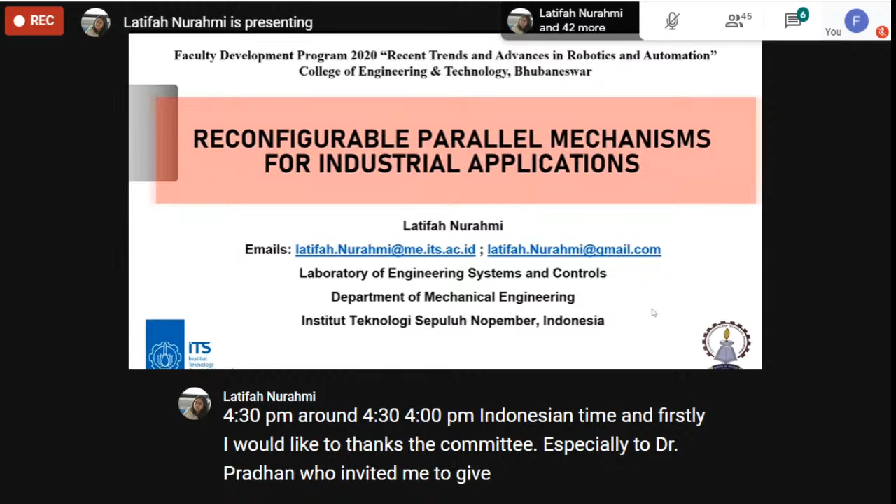All right, so good afternoon everybody. This is now 4:30 p.m., around 4:34 p.m. Indonesian time. Firstly, I would like to thank the committee, especially Dr. Pradhan, who invited me to give a talk this afternoon. And I would like to say welcome to the participants and thank you for joining my talk.

Without further ado, what I'm going to present today is mostly about my research. I would be very happy on this occasion to disseminate my research results. The topic I will talk about today is reconfigurable parallel mechanisms for industrial applications. I am Latifah, here's my email, if you like to discuss in more detail you can contact me either via Gmail or official mail. I'm coming from the Laboratory of Engineering Systems and Controls, Department of Mechanical Engineering, at Institut Teknologi Sepuluh Nopember.

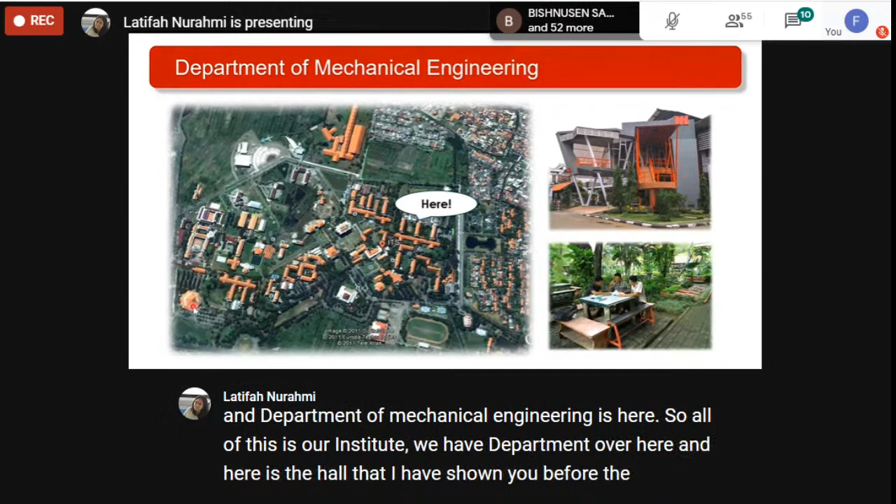We have a department over here, and here is the hall that I have shown you before, the hall to be rented for special occasions, public or even private. And in the right picture, this is the front gate of the mechanical engineering department. We have an M symbol for mechanical engineering, and here it is.

Our campus is very green. We have many big trees. Well, anyway, this is a rainforest tropical country, so we have many big trees, so the students may enjoy studying with their friends.

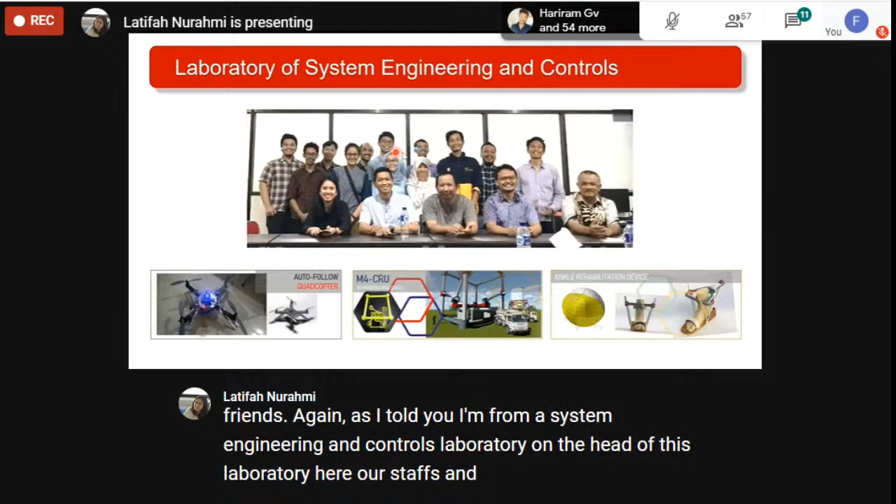Again, as I told you, I'm from System Engineering and Controls Laboratory. I'm the head of this laboratory. Here, our staff and students all together, this is what we are doing in this lab. So we are doing basically many things about controls, not specifically about robotics. Robotics is just part of it, what I'm doing. But my colleagues, they are doing also controls for industry, controls for process plant industry, and many applications.

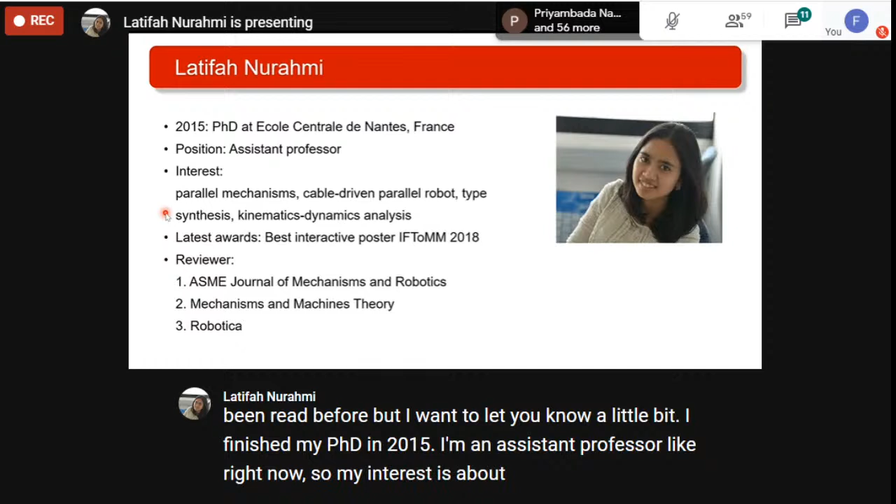My short biography has been read before, but I want to let you know a little bit. I finished my PhD in 2015. I'm an assistant professor right now. My interest is about parallel mechanisms, cable-driven parallel robots. I like to do type synthesis - this is more about design. And I'm doing kinematic dynamics analysis. I'm an active reviewer of ASME Journal of Mechanisms and Robotics. If you are doing research in robotics, then you will know this journal, Mechanisms and Machine Theory, and Robotica by Cambridge Press.

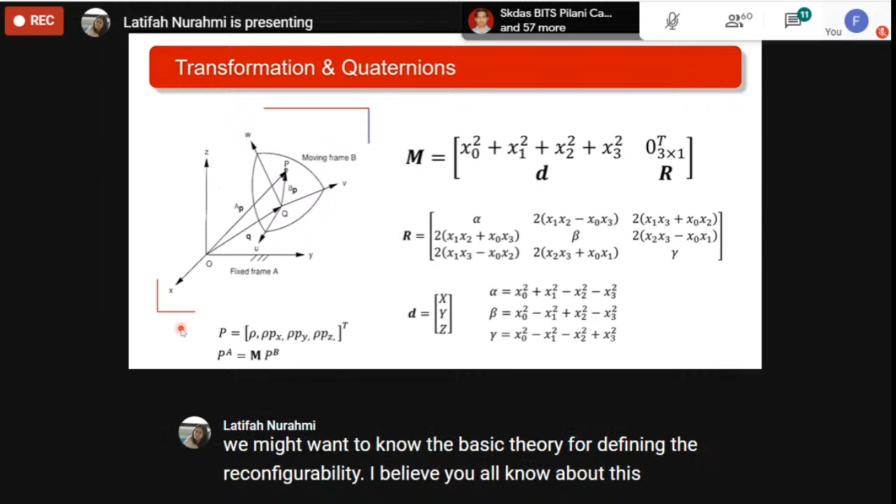All right, so before coming into reconfigurability, we might want to know the basic theory for defining reconfigurability. I believe you all know about transformations, since we are doing research in robotics. This is the main soul of robotics - it's about transformations.

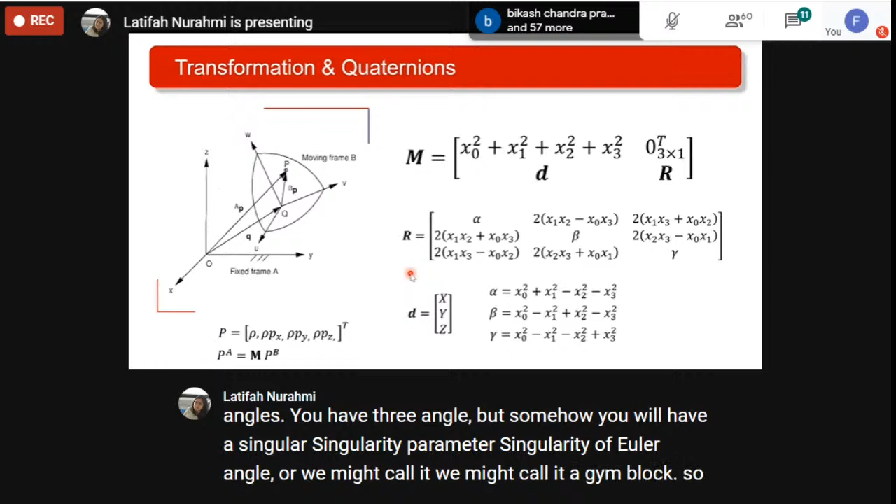And the transformation matrix that I use is basically the same like a Cayley - the Cayley algebra. And I am using Cayley or quaternion. Quaternion is more well known, so I'm using quaternions. Quaternions is basically homogeneous rather than using Euler angles. With Euler angles, you have 3 angles, but somehow you will have a singularity, parameter singularity of Euler angle, or we might call it Gimbal lock.

So instead of using Euler angles, I'm replacing it by using quaternions. I'm using 4 parameters, x0, 1, 2, 3. But if you search in many literature, they are using it with different notations, q0, 1, 2, 3 - basically they are the same. So here is my rotation matrix, and I have a translational vector d, and I believe you all know this - d is simply a translational displacement vector x, y, z.

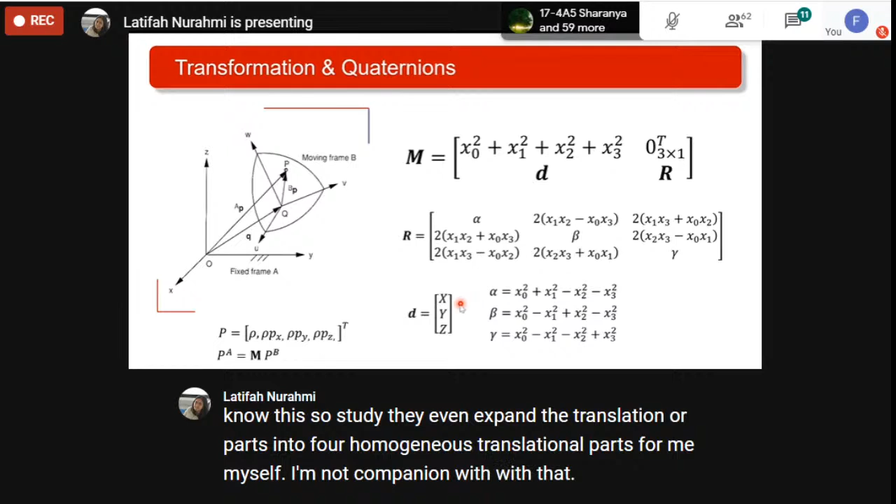My colleagues - I have been working with an Austrian robotician - they like transformations in terms of study. Probably you know this, so study expands the translational parts into 4 homogeneous translational parts. For me, myself, I'm not comfortable with that convention, so I prefer to use a displacement vector and rotational matrix in terms of quaternions.

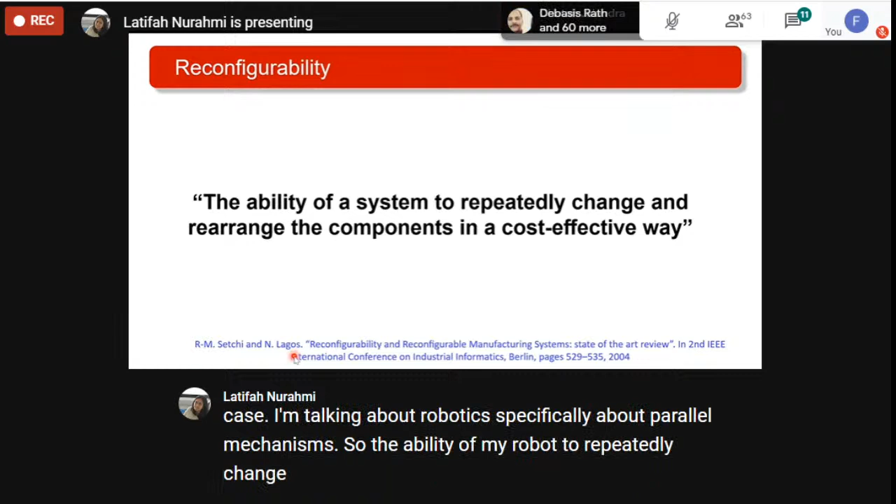So that was the basic - I believe you all know about that. Now let's come to the term reconfigurability. I've taken this from the paper of Setchi and Lagos. The definition of reconfigurability is the ability of a system, any system - in this case, I'm talking about robotics, specifically about parallel mechanisms - to repeatedly change and rearrange the components in a cost-effective way.

So without disassembly and assembling it back, I can change to different motion types, let's say, to different orientations continuously. So we call it a cost-effective way.

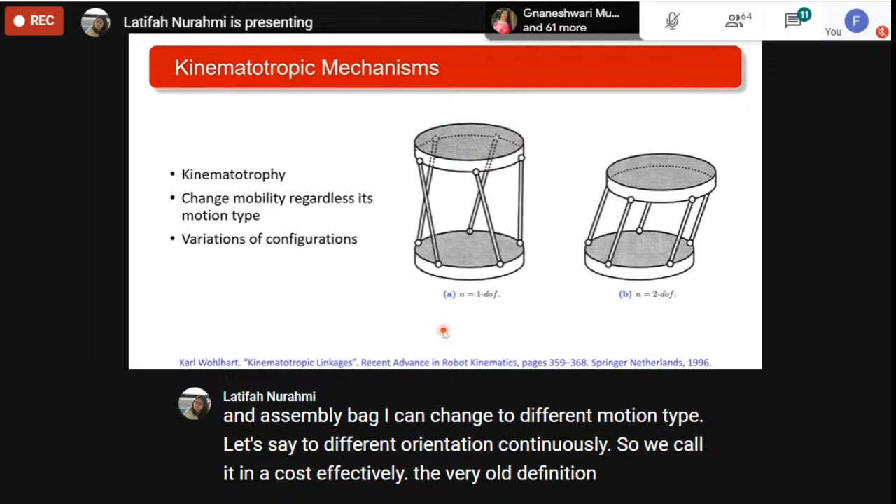The very old definitions of reconfigurability is kinematotropic mechanisms, based on the change of kinematic behavior - that's why they call it kinematotropic. So it has kinematotropy properties, and it can change mobility regardless of its motion type. We don't care whether it is 1 translation, 2 rotations, or 2 rotations 2 translations - we don't care about the motion type, but we care only about the change in the number of degrees of freedom. And it really depends on the variations of configurations.

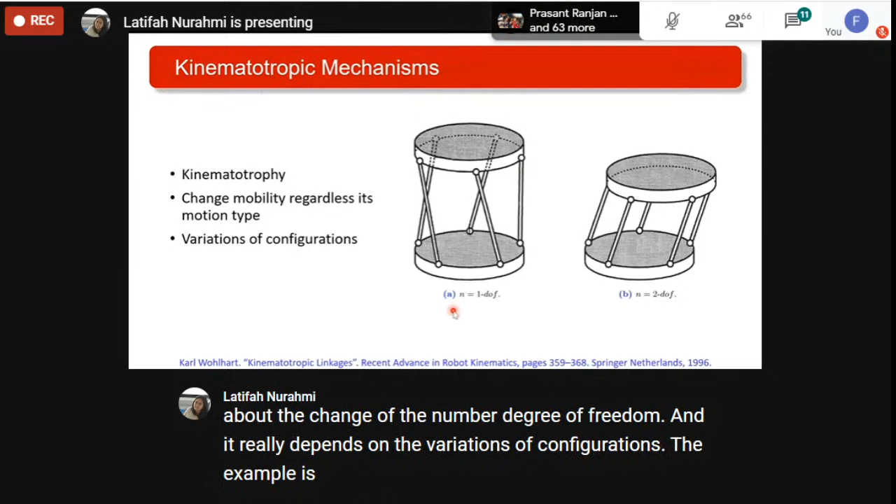The example is here - this is quite easy. Here is a spherical and spherical joint - there is no prismatic in the middle, so this is simply an SS kinematic chain. Then if you assemble it all together, you have like 5 legs all together. So you can either make it straight like this, then it will have 2 degrees of freedom - you will have translation, right? Circular translation. Or if you twist the kinematic legs, then you have only 1 degree of freedom rotational motion.

So this is the definition of kinematotropic mechanisms, the very beginning description of reconfigurability.

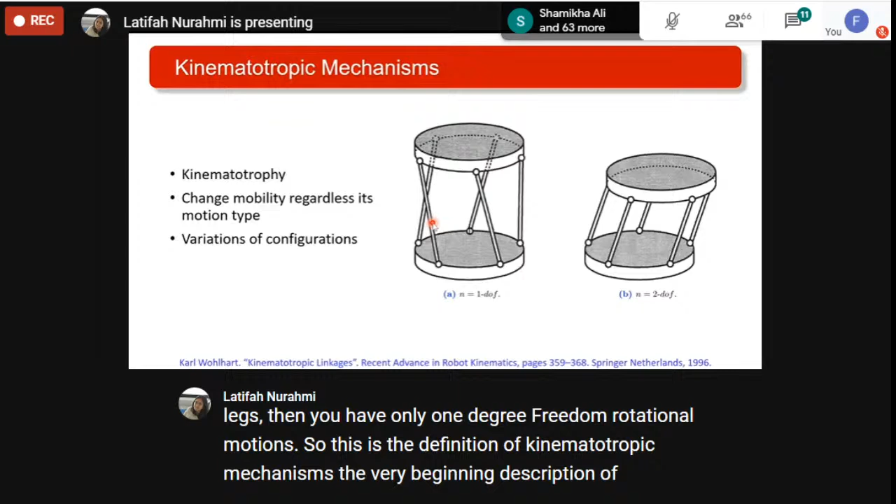Okay, right now let's continue to the second definition. So reconfigurability covers many sub-definitions, and the second definition is metamorphic mechanisms.

It is based on the characteristic, the animal characteristic of metamorphism. So the term was adopted from that.

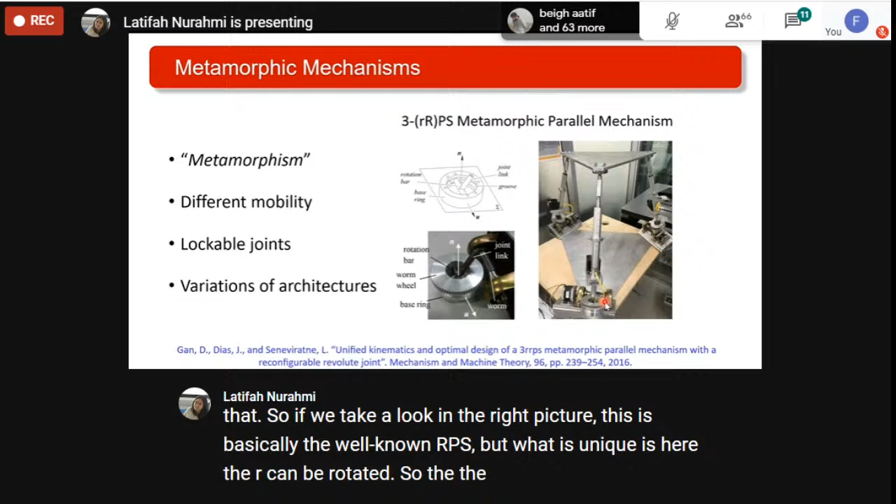If we take a look at the right picture, this is basically the well-known RPS. But what is unique here is the R can be rotated, so the axis of the revolute joint can be oriented to different directions. That's why we call it R small and R capital, because the R small is meant to change the direction of the revolute joint.

If we take a look here in more detail, we have this revolute prismatic along the way. The direction of U can be rotated like this due to the rotation about N. So we call this a metamorphic joint, because once it can be revolute when you fix the discrete rotation of N, and once it can be a universal joint. So it is a metamorphic joint.

If you assemble that into mechanisms, we call it metamorphic parallel mechanisms. So what happens if you use this kind of metamorphic joint? You will have a change of mobility. I will talk in more detail about this.

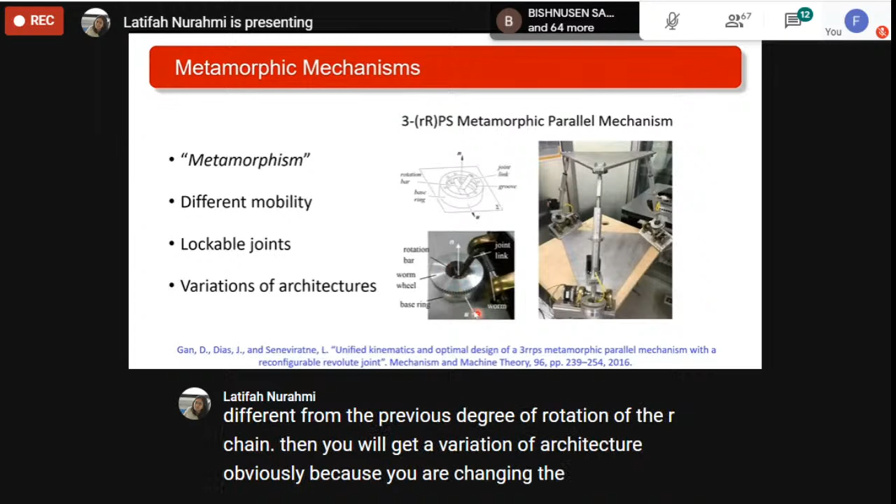We call this joint a lockable joint, because after you rotate it some degree, you lock the small r, and you will get RPS, but the motion of this RPS will be totally different from the previous degree of rotation of the R joint. Then you get variations of architecture, because by changing the direction you get a different architecture of RPS. This paper was published with my colleague Dongming Gan, and we met at a conference.

By the way, conferences are very good events for us to meet with other researchers and collaborate. I met him at a conference in Hong Kong, and we found something in common. He had a problem, and I had the tool to solve it, so finally I could use my tool to solve his problem.

He had that robot back in his office, but he wanted to know about the workspace, how the mechanism behaves with the change of the lockable joint, with the change of the metamorphic joint. So we used the powerful tool based on quaternions.

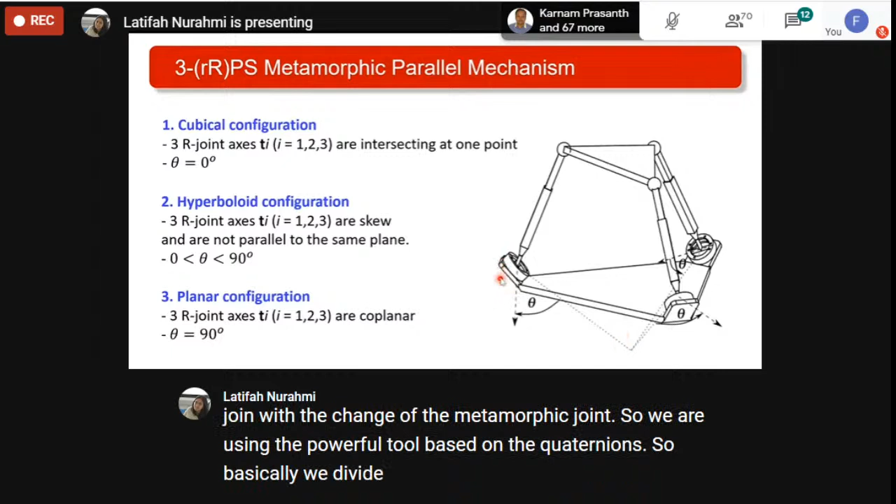Basically, we divide the architecture into three categories. The first category we call cubical configurations, because if theta is 0, all the revolute axes will intersect at one point, and at some angle these dashed lines can be orthogonal to each other. That's why we call it cubical configurations.

The second configuration is hyperboloid, where theta is within 0 and 90 degrees. You can imagine all revolute joints are skew and become a hyperboloid. Hyperboloid is like when you have sticks vertical altogether and you twist it, then you get this hyperboloid configuration.

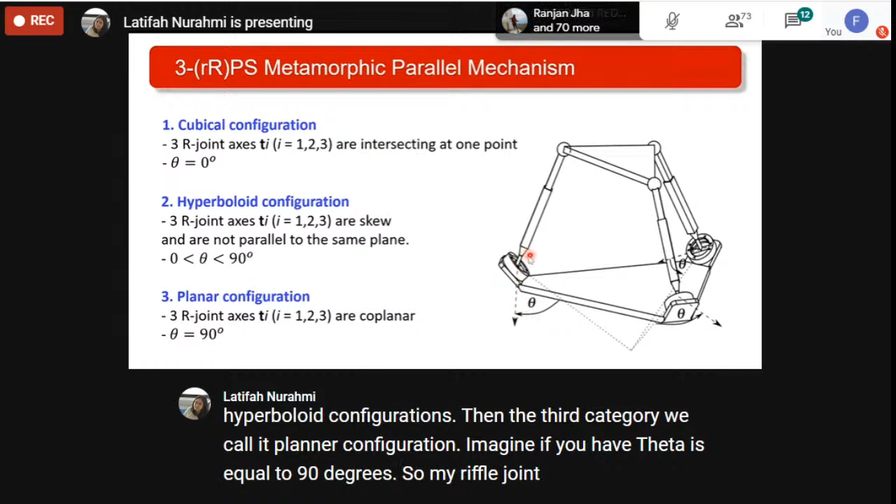The third category we call planar configuration. Imagine theta equals 90 degrees, so all my revolute joints will be horizontal. The well-known traditional RPS belongs to this category.

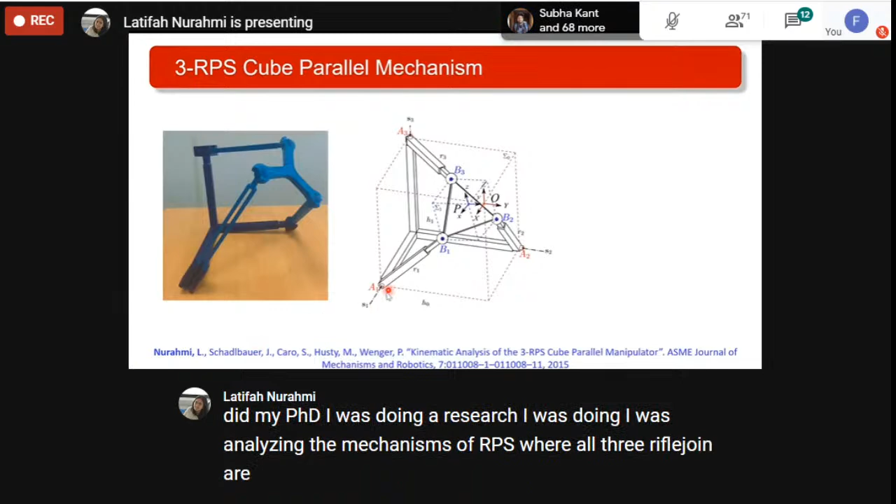After defining all the configurations one by one, now we will focus on the first configuration, cubical configurations. What is unique about this mechanism is, back when I did my PhD, I was analyzing the mechanism of RPS where all three revolute joints intersect at one point and are all perpendicular to each other. So we still call it RPS, but with an additional term: RPS cube parallel mechanisms.

This was done during my thesis, using algebraic geometry. This is a very powerful tool, algebraic geometry. And everything was done in implicit equations.

Basically, this point B, the spherical joint at point B_i, is moving on the yellow plane perpendicular to the axis SI. So I can formulate it in terms of geometry and algebra, and get the constraint equations.

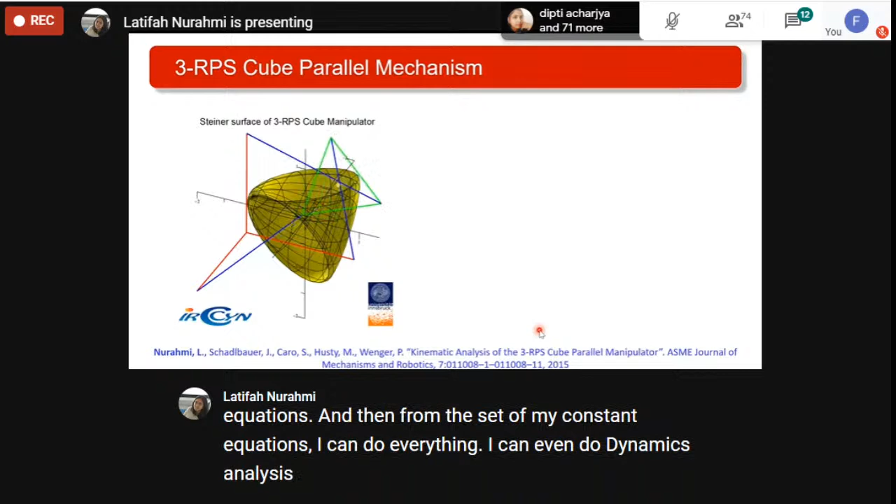From the set of my constraint equations, I can do everything, even dynamics analysis, because those are the basics. Here, my focus was to find the workspace. This was a collaboration with Innsbruck University, with a professor from Austria.

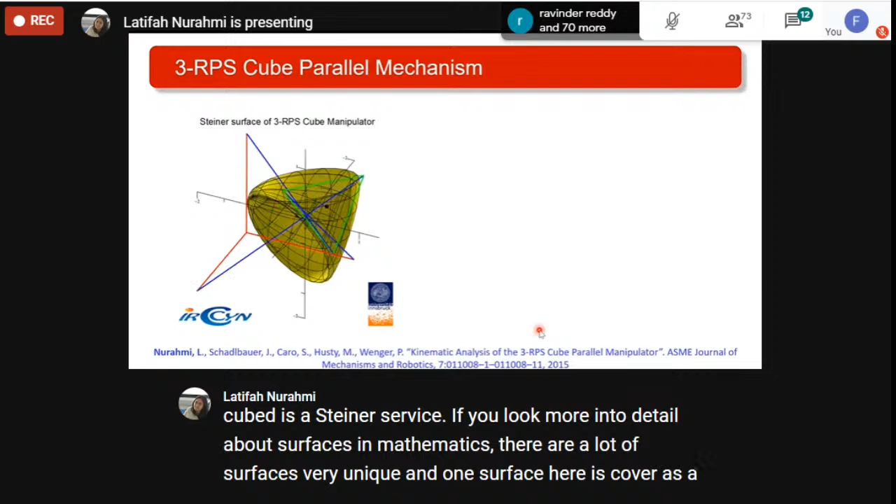My workspace, the workspace covered by this RPS cube, is a Steiner surface. If you look in more detail about surfaces in mathematics, there are a lot of very unique surfaces, and one of them is covered as the workspace of my mechanism. You can see in the left animation how my mechanism moves inside the workspace. Yes, this is actually the Steiner surface.

I'm going to tell you a bit of detail about what it is. This surface has self-intersecting and symmetrical surfaces. All the surfaces are symmetrical, and it has lines that intersect all together at one point here.

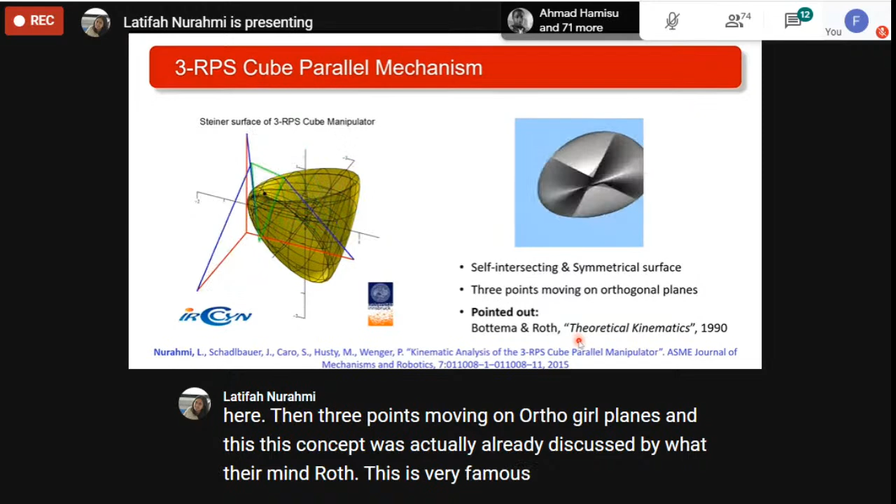Three points moving on orthogonal planes - this concept was actually already discussed by Bottema and Roth in their very famous 1990 book, Theoretical Kinematics. If you want to focus more on kinematics, I suggest you read this book. It's old, but it also discussed three points moving on three orthogonal planes.

Imagine, years later, those theories actually exist these days - here is my robot. The three points of my platform are moving on three orthogonal planes. This work has been published in the Journal of Mechanisms and Robotics in 2015.

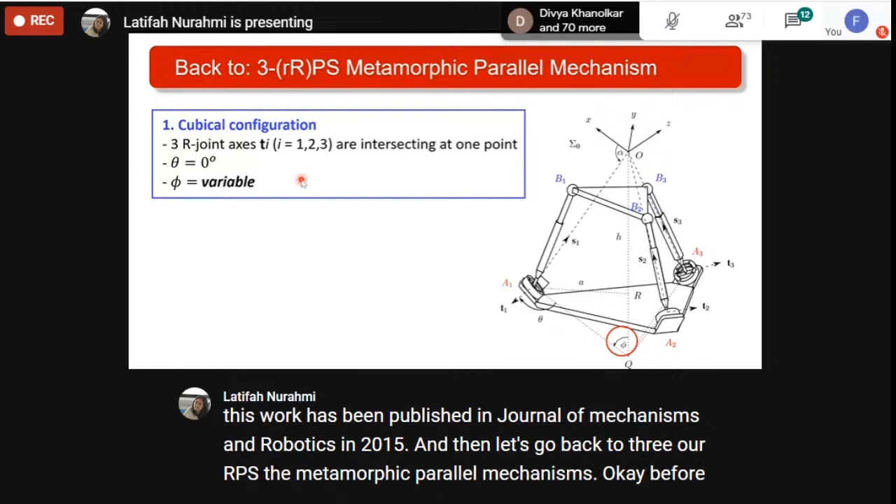Let's go back to 3-RRPS, the metamorphic parallel mechanisms. Before, what I presented to you was 3-RPS done during my thesis work. Then when I met my partner here, we discussed his mechanisms and his problems. Finally, the topic I covered was a subset of his.

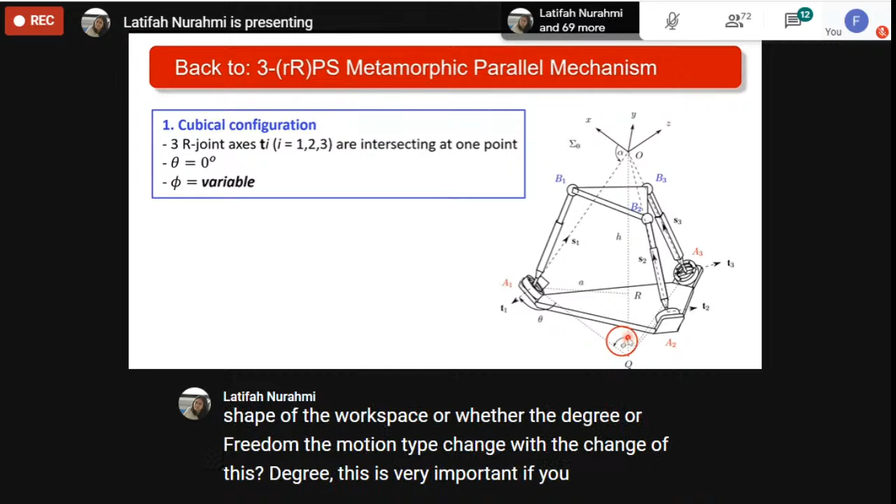The first configuration is the cubical configuration, when theta equals 0 and phi equals some degree from 0 up to 90 degrees. Now we want to see how the platform behaves - meaning the shape of the workspace, and whether the degree of freedom or motion type changes with this degree. This is very important if you want to design something and know whether your platform really targets your application, either for surgical or industrial use. So this is what we were doing.

With the change of phi, varying from 30 degrees, 45, 54.7, and 60 degrees, see how the workspace looks. It looks exactly like what I covered 5 years ago. My workspace, the Steiner workspace, is this one. When phi equals 54.7, all these dashed lines become perpendicular to each other, become orthogonal to each other.

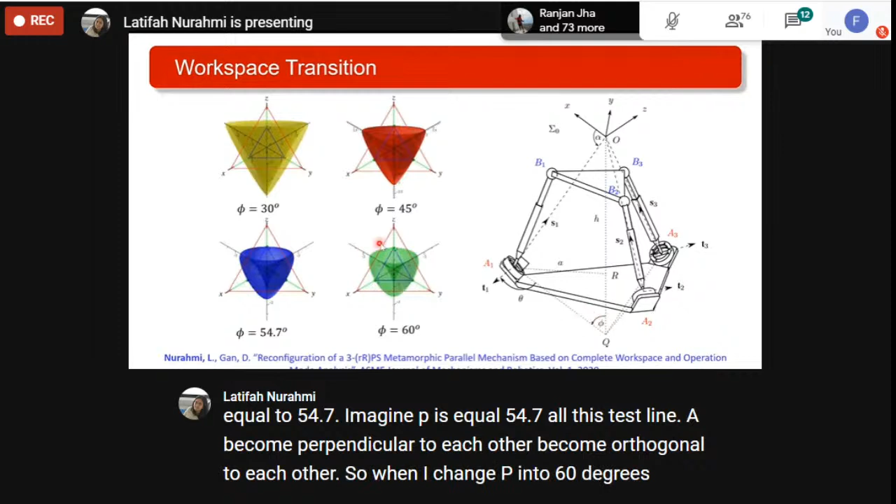When I change phi to 60 degrees, the workspace is still a Steiner surface, but it'll be a bit elongated. Or when I change phi to 30 degrees, my workspace becomes flatter and flatter. This work has been published this year with my partner Dongming here - you can check it in the ASME Journal of Mechanisms and Robotics.

Now the third configuration - I'll jump into it when theta equals 90 degrees. This is a well-known RPS. All these dashed lines with an arrow here become planar, lying on the horizontal plane.

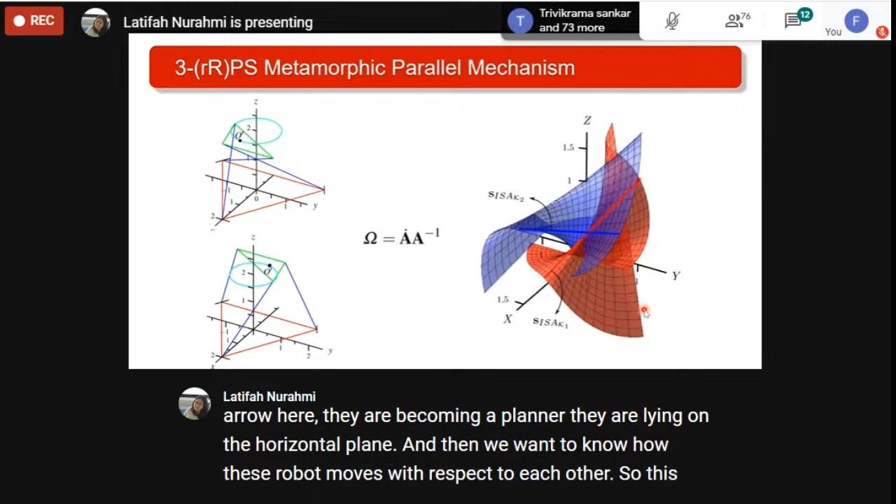We want to know how this robot moves with respect to each other. This robot has what we call a new terminology, operation mode, defined by the number of degrees of freedom and the motion type. This mechanism has two types of operation modes, but people didn't know how to distinguish these two operation modes.

It has been an issue for this decade, for the last decade. So what we are trying to do is reveal how we can distinguish between operation mode 1 and 2.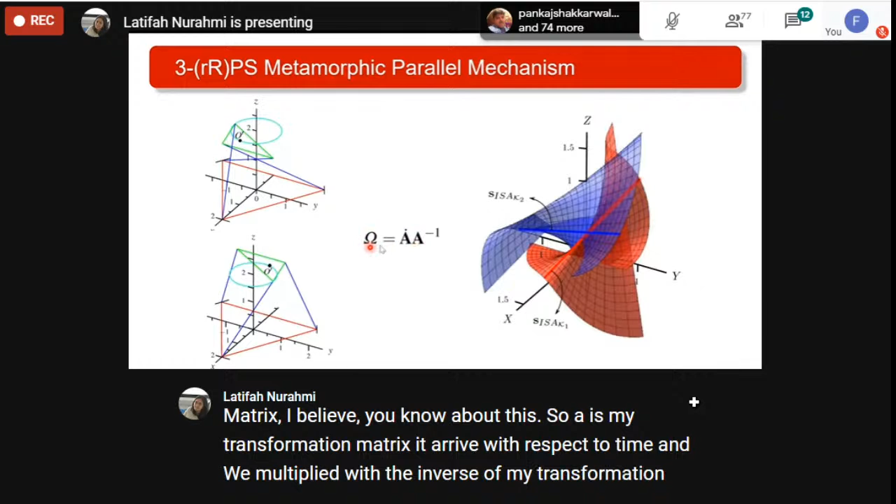What we have done is derive the velocity matrix. I believe you know about this - A is my transformation matrix. We derive it with respect to time, and multiply it with the inverse of my transformation matrix, giving a velocity matrix. The rotational part is a skew, where you can take the angular velocity directly, and the translational part is the linear velocity of my platform.

The difference between the bottom and top figures - these two - we can differentiate by defining the axodes. I hope you already know the axode. It's just like the centrode, the instantaneous center of rotation in the planar case, but axodes are the instantaneous axis of rotation. Imagine if my platform, shown in green, is moving with some degree of rotation while also translating at the same time.

The collection of the axis becomes like this, the blue surface. We call it a ruled surface because it's generated by lines - imagine straight lines all together forming a surface. The same applies for the second operation mode. We define it using the velocity matrix, taking its components to define the axode, how the axis of rotation of this platform behaves.

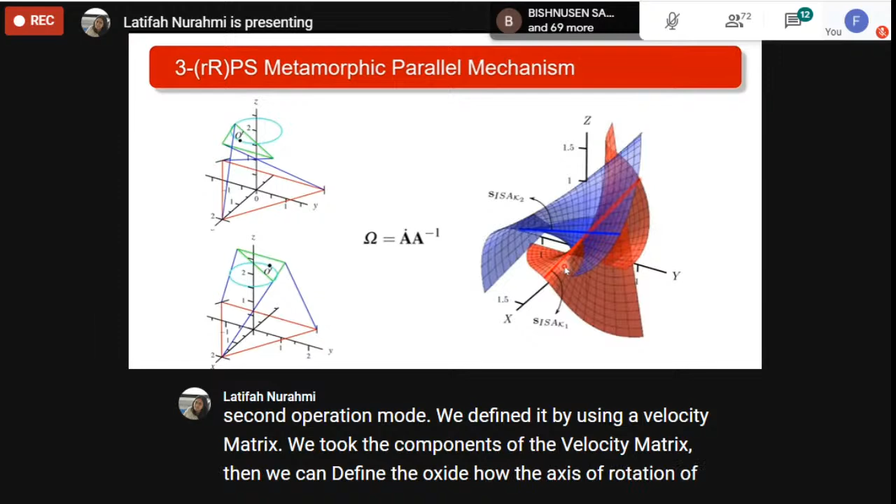All right, now let's continue with reconfigurable parallel mechanisms. Here is a parallel mechanism we call the DYMO Robot. It was proposed by Zlatanov, Bonev, and Gosselin in 2002 in a conference.

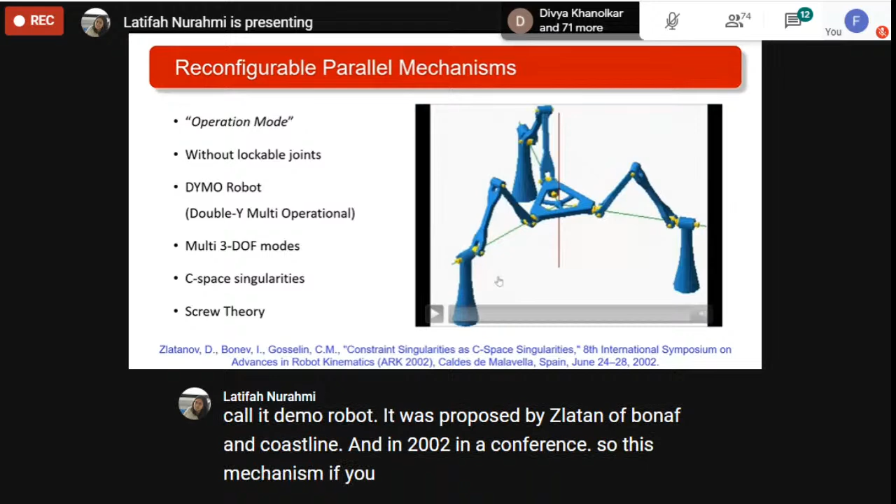If you take a look closer, each kinematic chain is composed of 5 joints, all revolute joints. And then you assemble it all together like this with these configurations.

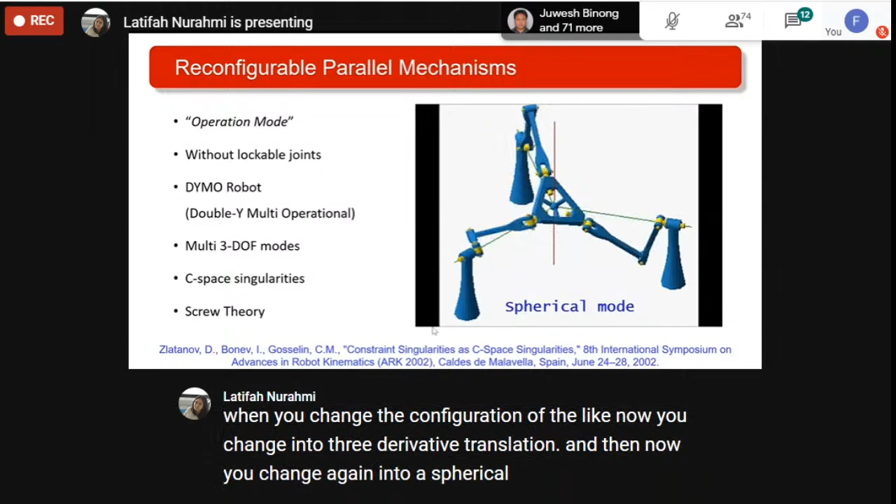Here the platform is in planar motion. Then when you change the configuration of the leg, now you change into 3-degree-of-freedom translation. And then now you change again into a spherical mode about the center point.

Okay, so that is actually the concept of reconfigurability. We change the motion type, we change the number of degrees of freedom, and that's possible without disassembling the mechanism. That is the concept of reconfigurable parallel mechanisms.

So we call it operation mode. As I told you before, operation mode is defined by the number of degrees of freedom, the motion type, and also the normal vector of this platform. And we don't need a lockable joint, so it is quite different from the term metamorphic mechanisms.

If we take a look here, there is no lockable joint, there are no metamorphic joints. All joints are moving, and with the motion of all joints, the platform can change its operation mode.

So this robot is named the DYMO Robot, double-Y, multi-operational. It has 3 degrees of freedom motion, but it can change to different motion types.

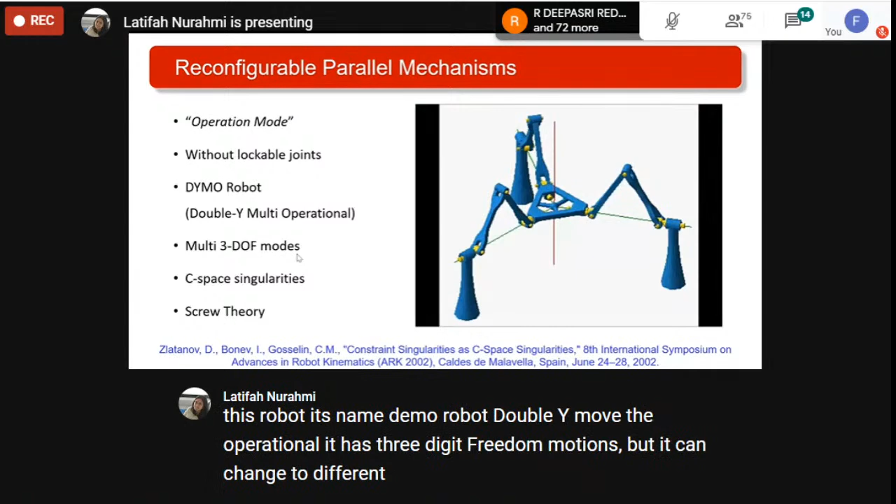To change into a different motion type, it has to cross what they call C-space singularity. C stands for configuration, but my group calls it constraint singularity, because the robot loses some constraints, so it is in a constraint singularity. The way they discussed and reviewed this mechanism was based on the well-known screw theory.

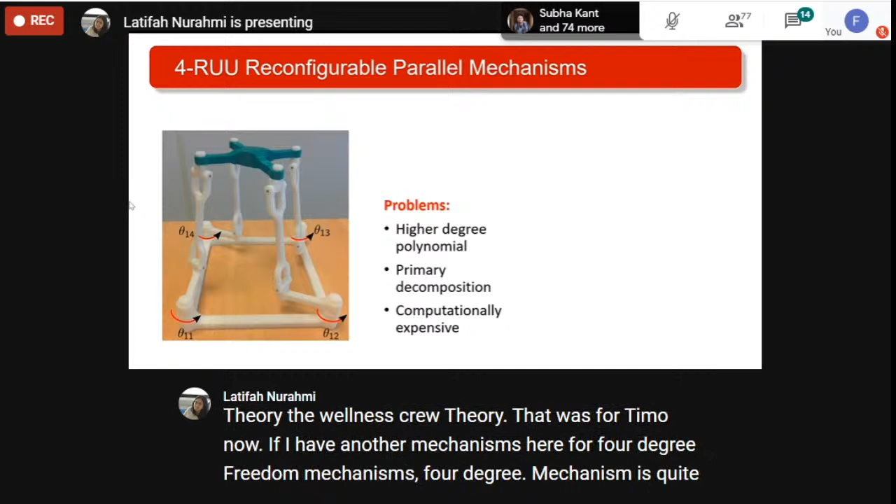That was for the DYMO robot. Now if I have another mechanism here, a 4-degree-of-freedom mechanism, it is quite useful for many industrial applications, like pick and place applications.

They use 4 degrees of freedom because they need to rotate, to orient the platform to pick the candy, for example. Then it has to be oriented in some way so that it can be put in a box with the same orientation.

So here now I have a 4-degree-of-freedom parallel mechanism. It has 4 kinematic chains -- we call them kinematic chains, or you can call them legs, there are many terms for that. And here is my kinematic chain.

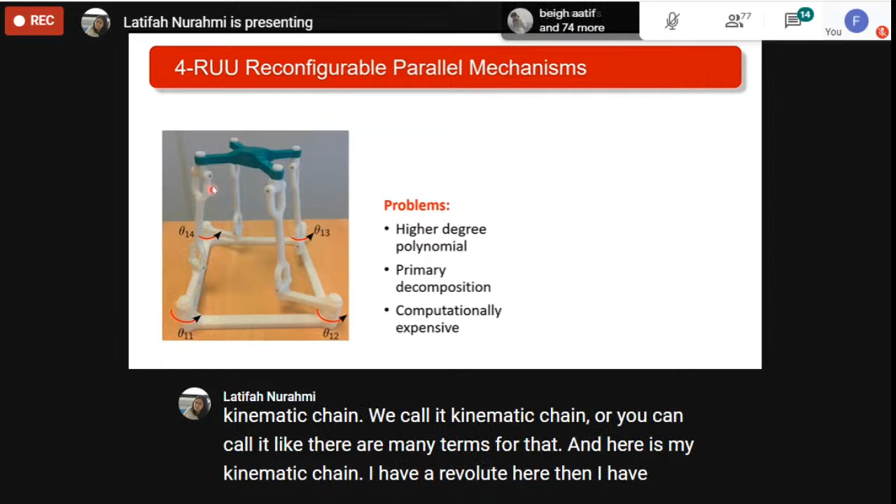I have a revolute joint here, then I have a U-joint -- 2 U-joints, one U-joint at the bottom and one U-joint at the platform, attached to the platform.

This mechanism has 4 degrees of freedom, and the first joint at each kinematic chain is actuated. Here's the set of my actuated joints: theta 1,1, theta 1,2, 3, and 4.

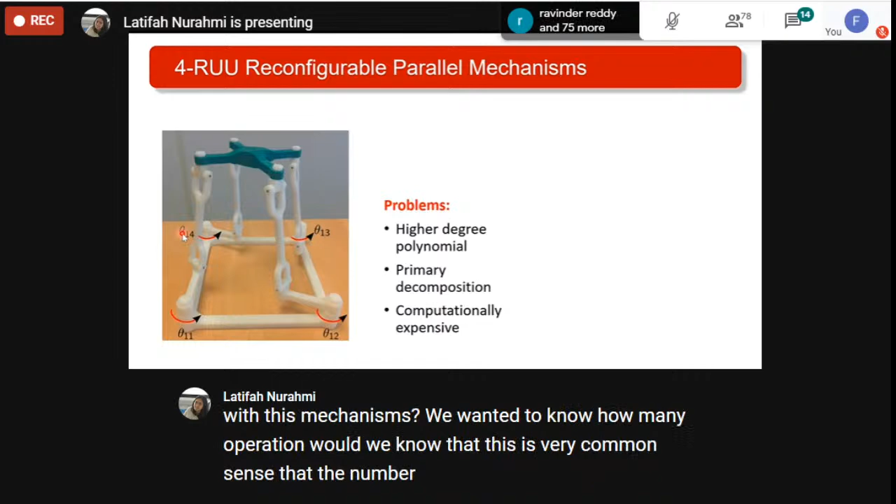Now what is the problem with this mechanism? We wanted to know how many operation modes it has. It's common sense that the number of degrees of freedom of a fully parallel mechanism usually equals the number of legs, the number of kinematic chains. So we want to know whether this mechanism has another degree of freedom or another motion type. It is possible -- okay, what is the problem?

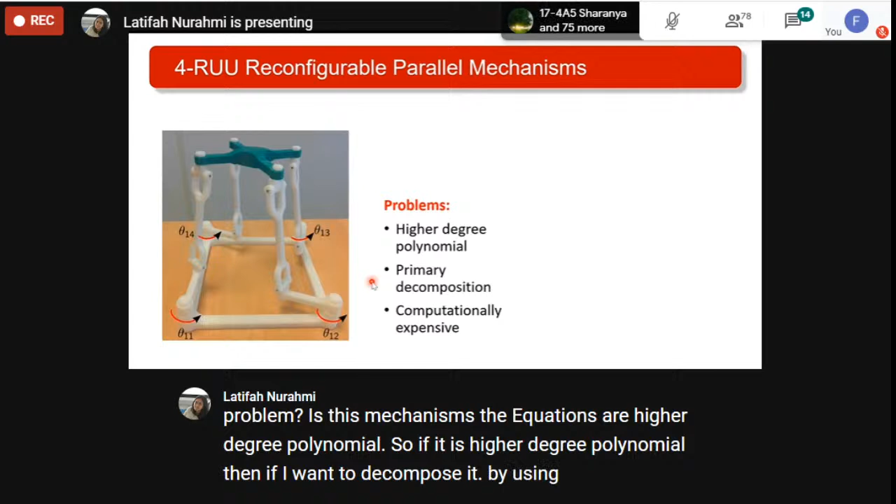The problem is that in these mechanisms, the equations are higher degree polynomials. If it's a higher degree polynomial, then decomposing it using primary decomposition will be computationally expensive, right?

So what we did was decompose the platform into 2 like this -- the platform is decomposable. Now I have 2 types of mechanisms with the same base, but a different platform. Now I have RUU, 2 mechanisms with the same degree of freedom.

All right, so after decomposing it into 2 different mechanisms with the same base, now I can formulate the constraint equations.

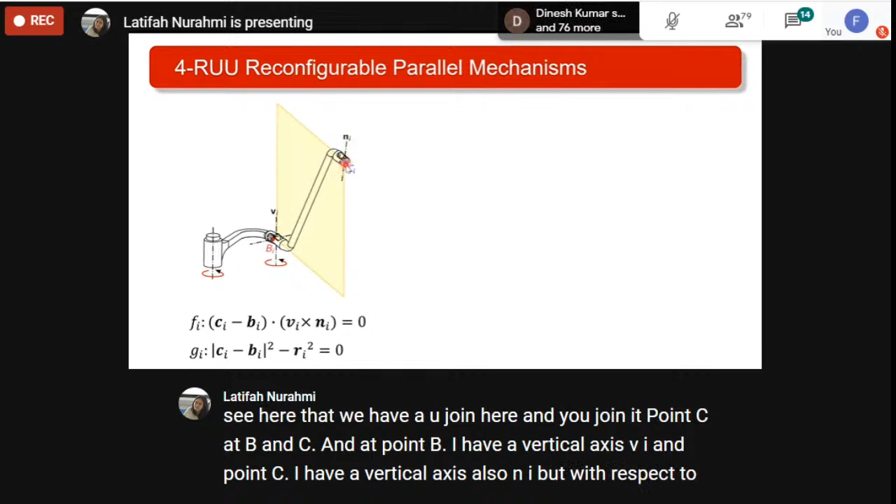We can see here that we have a U-joint at point B and at point C. At point B I have a vertical axis VI, and at point C I have an axis NI, but with respect to the moving coordinate, so NI is not always vertical, while VI will always be vertical. So I can formulate an algebraic geometry formulation such that vectors VI, NI, and BC always lie on the same plane. The formulation I used here is the parallelepiped equation, or what they call the triple product.

And finally, after formulating my constraint equations, I can do the primary decomposition. Our initial hypothesis was right, that this mechanism can perform another degree of freedom.

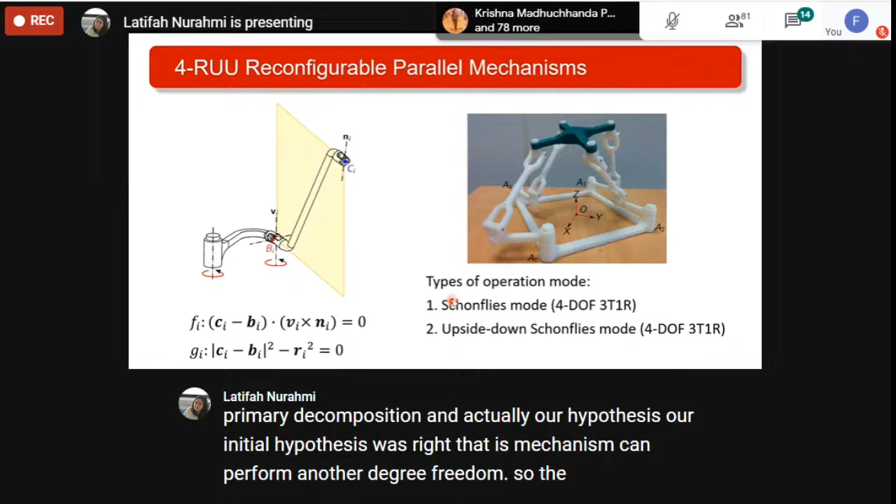So the first operation mode is Schoenflies. Schoenflies was a geometrician, mathematician who characterized the 4-degree-of-freedom motion, which is why up to now this motion is named after him -- we call it Schoenflies mode, or Schoenflies motion.

And then the second operation mode is upside-down. Well, this is quite imaginary, but in theory this is possible. In reality this is probably not a possible one. So you flip the platform upside down, and you can still move it in a 4-degree-of-freedom motion.

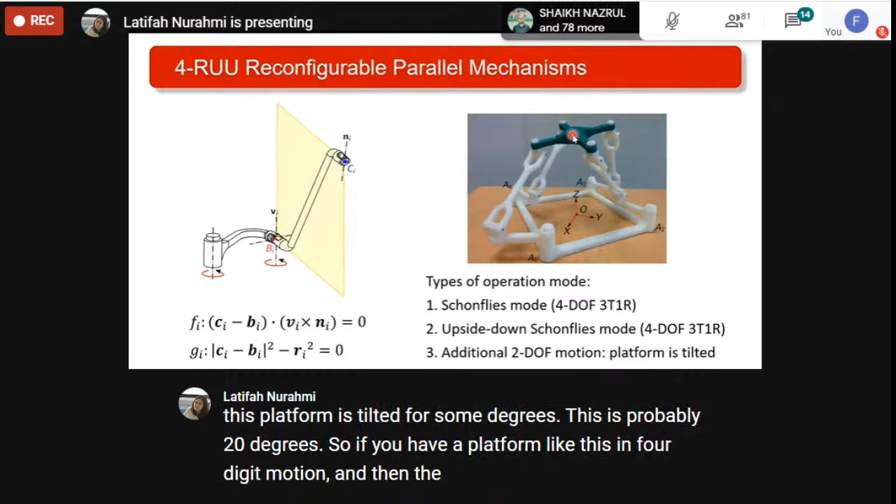And then the third operation mode is when the platform is tilted, like this picture. So this platform is no longer parallel to the base, and it's tilted for some degrees, probably 20 degrees. So if you have a platform like this in 4-degree freedom motion, and the platform is no longer at 0 degrees but tilted some way, then you have to be worried that your mechanism is no longer 4-degree freedom motion.

And now, will it be possible for my mechanism to switch from Schoenflies mode to upside down Schoenflies mode, to an additional mode where my platform is tilted? Yes, it is possible. So we can see here.

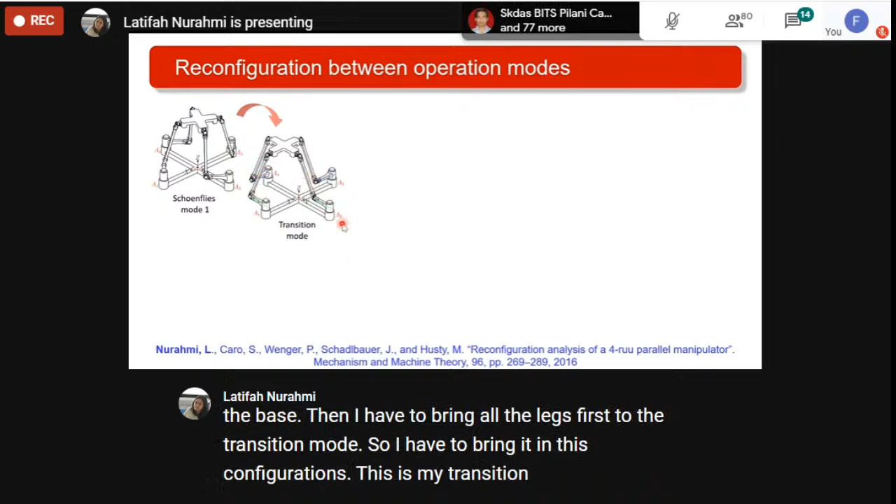So this is my Schoenflies mode where my platform is flat, parallel to the base. Then I have to bring all the legs first to the transition mode, so I have to bring it into this configuration. This is my transition mode. And then finally, when I am in the transition mode, I can tilt my platform like this.

So now, in this configuration, my platform is no longer performing 4-degree freedom motions. So when you are using this kind of mechanism for pick and place operation, and finally you are in the transition mode somehow, then you have to be worried that your platform will behave and change to another motion.

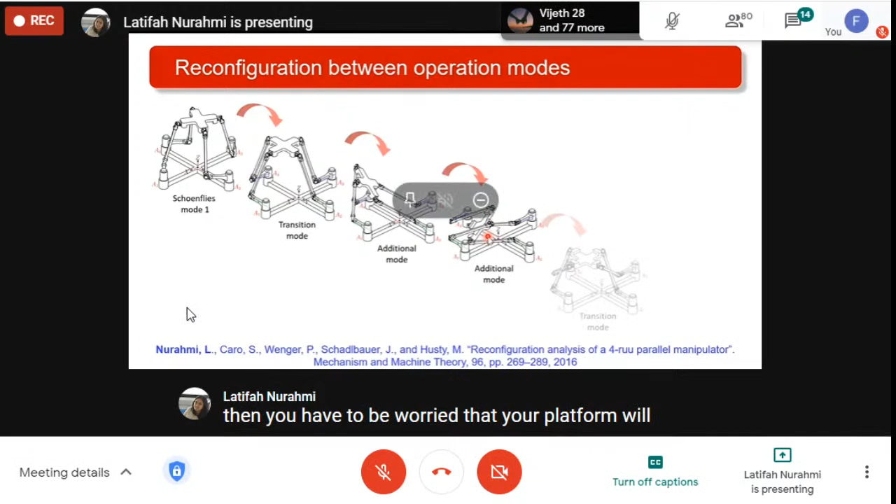And then, yep, now my platform tilts even more. Then finally, my platform is upside down. Again, this is in theory possible. In theory it is possible, but in application this is not possible. But anyway, we can see that this mechanism has several operation modes. These 3 cases are possible.

Okay, in some way, if you don't know your mechanism quite well, your robots can behave differently. And this work has been published in 2016 in Mechanism and Machine Theory. If you want to know more details, you can check the paper.

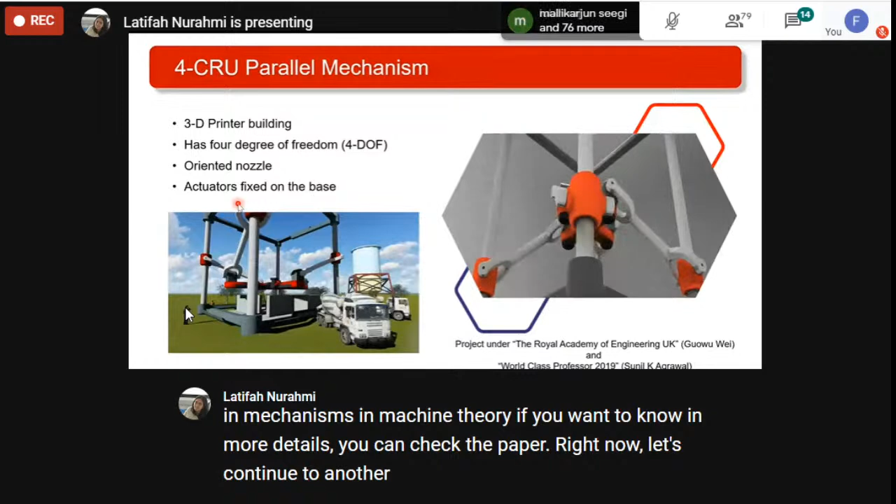Right, now let's continue to another mechanism. That was the mechanism that I analyzed. Now, in a project that I'm having with my partner in the United Kingdom from Salford University, we have a project to build a mechanism for a 3D printer of a house, 3D printer building.

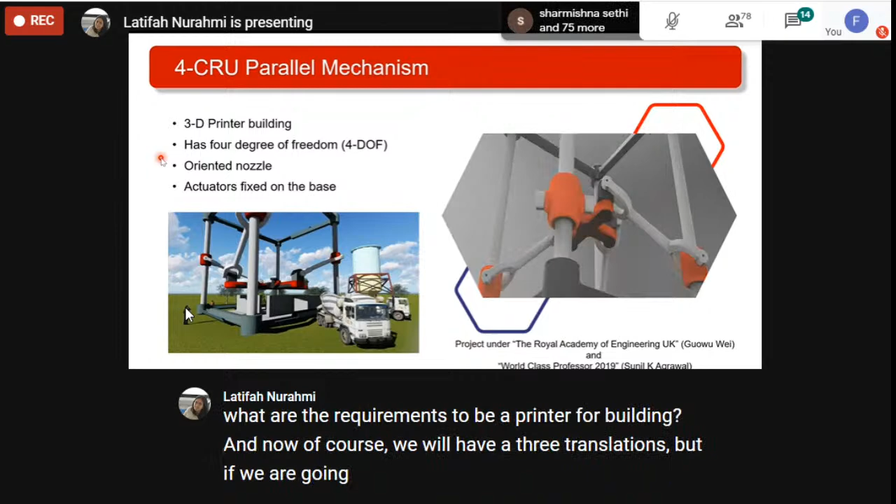And then we listed the requirements. What are the requirements to be a printer for a building? Now, of course, we will have three translations, but if we are going to use a non-symmetrical shape of nozzle, imagine if you have a rectangle nozzle, not a square or circle area of a nozzle, then if I print, let's say, 1 meter, and I have to print another wall, I have to maintain the same thickness of my walls. So I have to somehow, in the corner, change the orientation of my nozzle, right? So it means I need an orientational function of my platform about a vertical axis.

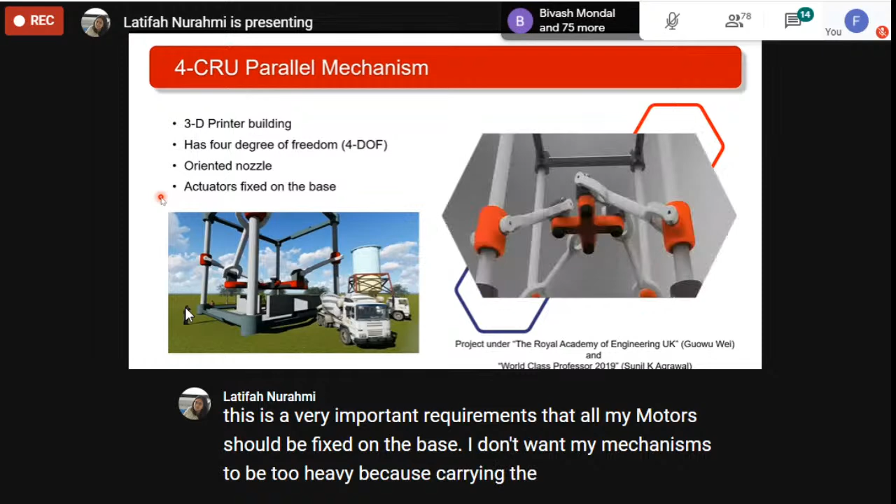That's why we came up with the 4-degree of freedom motion mechanism, so that the nozzle can be oriented. And this is a very important requirement: all my motors should be fixed on the base. I don't want my mechanism to be too heavy, because carrying the nozzle, the mixer, and the dough are quite heavy, and I don't want my mechanism even more heavy by carrying the motors. So the most important requirement is my motors should be fixed on the base.

It is actually the concept of my mechanism. My motors, well, this is not a real concept yet, because we are not going to use this kind of actuators. We are going to replace it with a hydraulic. But anyway, this is the conceptual design of our 3D printer building.

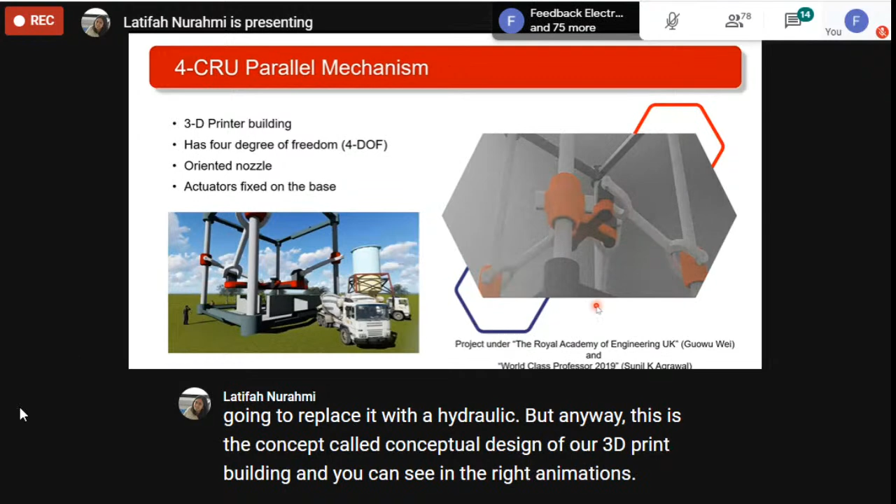And you can see in the right animation, this is how it looks. This is what we printed actually. So the way we designed something is we came up with CAD software, first CAD design, then we printed, and we see whether it works perfectly, whether it follows or obeys the laws of kinematics and dynamics.

Then finally, we build the second prototype. We have several prototypes. The first prototype is by 3D printer, we printed our printer. So now we have a second prototype, using real motors but at a mini scale.

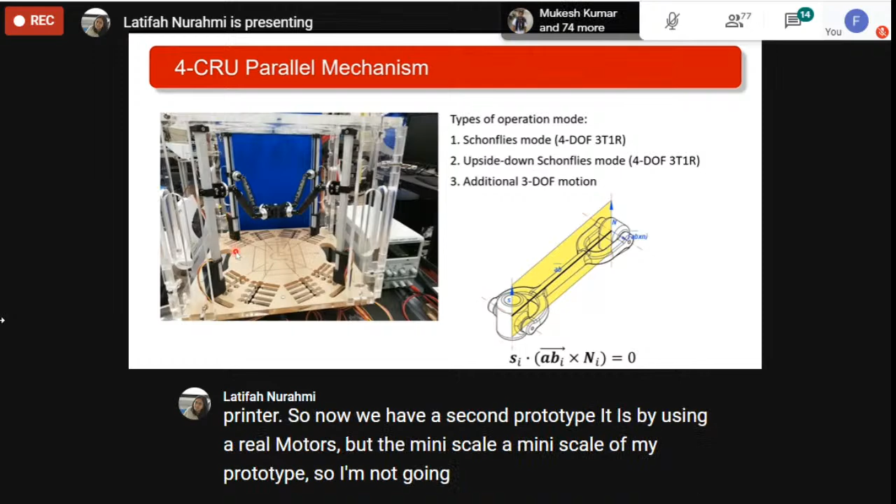This is the mini scale of my prototype. I'm not going to show the video yet because it's not done, and it's quite confidential for the project, but I can show the picture here. Here is our motor, 4 motors, and here is the platform. We have a U-joint attached to the platform and attached to the motors.

We want to know what is the workspace and where is the transition region, so that the platform will change into another motion. We want to anticipate that. So we formulate the equations using the algebraic geometry approach. Basically, these 3 vectors lie on the same plane, so we can formulate constraint equations, and based on these we come up with very interesting results.

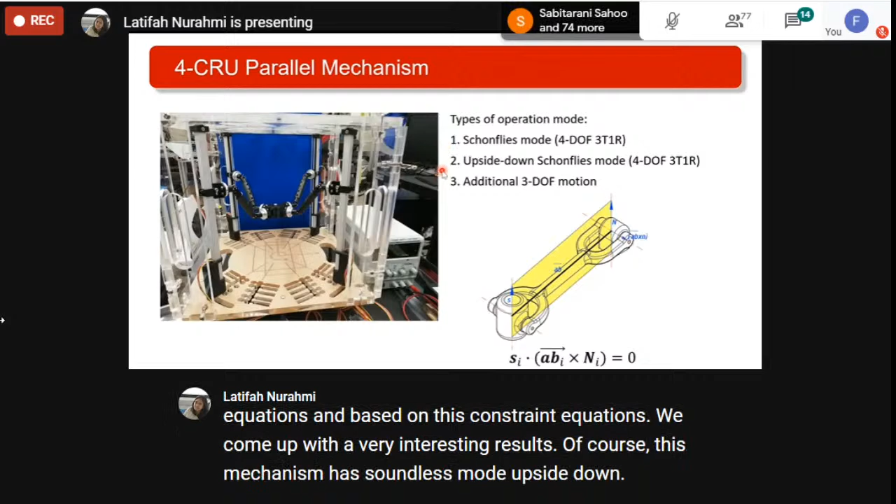Of course, this mechanism has Schönflies mode, upside down Schönflies mode, just like before. And number 3, it has an additional mode, and this additional mode is 3 degrees of freedom. So the degree of freedom degenerates from 4 into 3, and we're going to look at what this 3 degree of freedom motion is.

So the first operation mode is Schönflies mode, as we know before, where this platform will have 3 translations. We can see it in the transformation matrix. By the way, how can you define the mobility? Instead of using the Grubler-Kutzbach criterion, you can also analyze the transformation matrix.

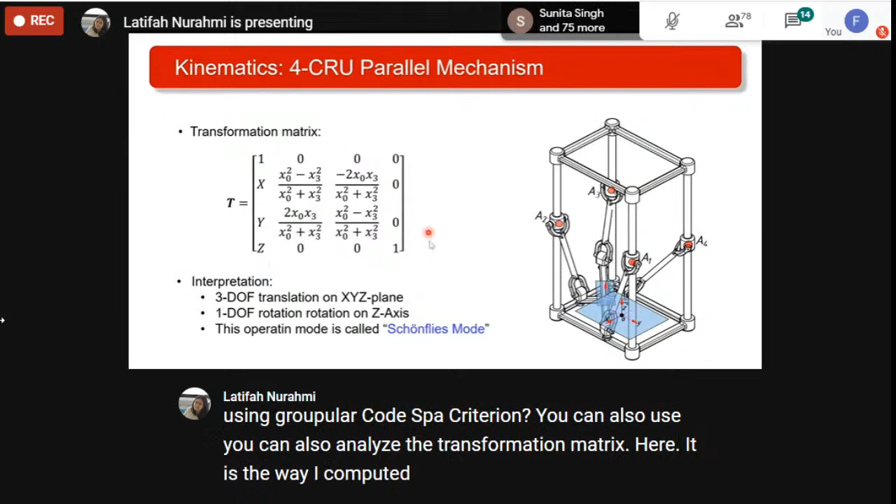Here is the way I computed my mobility, by seeing the transformation matrix. It has 3 for x, y, z, which means this mechanism has 3 translations, and the remaining rotational components are only x0 and x3, and here it is 1. So we can see that it has 1 rotation about the vertical axis.

The way I define this transformation matrix is quite different. This is a European style, specifically Austrian style, where the homogeneous scale is at the top. You can change it if you're more comfortable putting this scale 1 at the bottom - there will be no difference at all. So we call this mode the Schönflies mode.

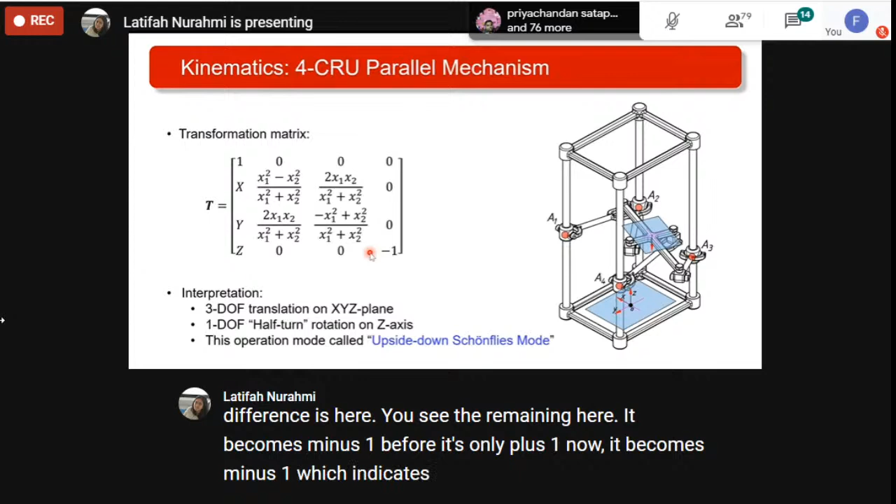Design parameters are here: A, B, C, D. Parameters that define the length of my platform, the length of my base. Those are design parameters. So what do these equations tell me? Basically, if I change the geometry of my robot, my additional mode will behave differently.

Okay, let's take a look. I have a video here. So now I can make a conclusion in a table that I can switch from Schönflies mode into additional mode if, let's say, the base is equal to the platform, or when the base is smaller than the platform, then our additional mode will be completely different. So I'm going to show you the video here.

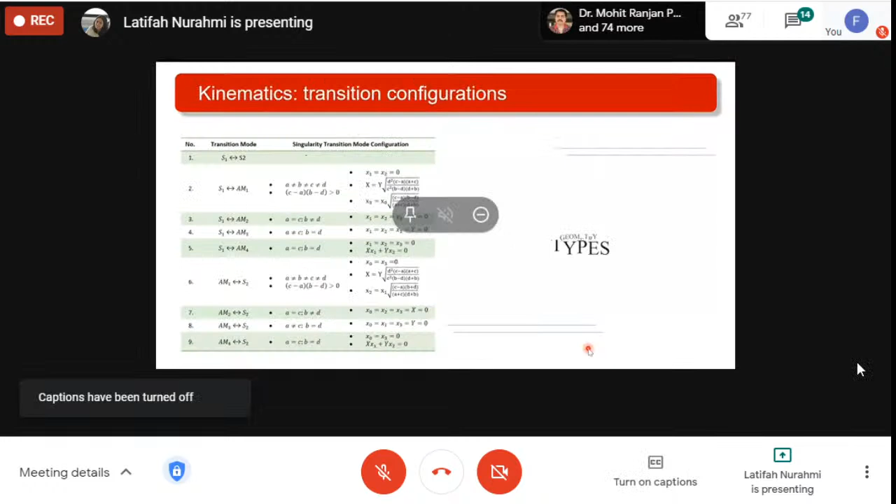So here is A, B, C, D, the design parameters, and we have 4 types of geometry. You see that the base, we can make it smaller, we can make it longer, bigger - we can change the design parameters.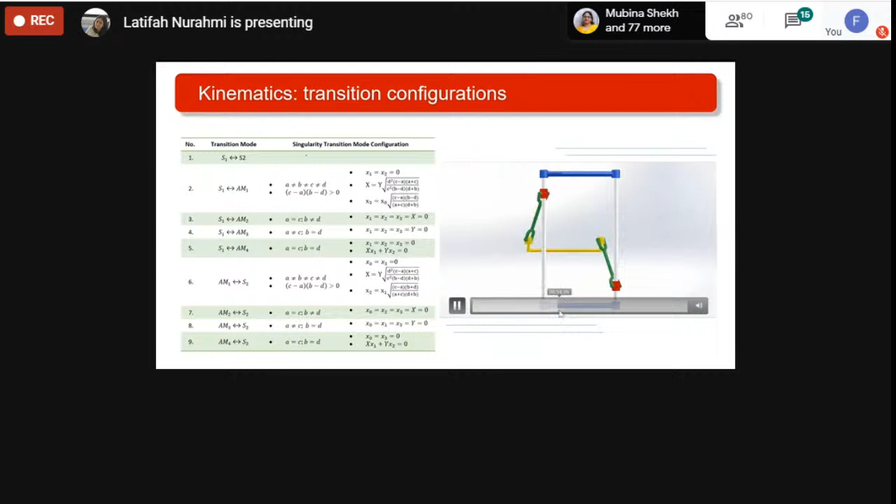So first here we simulated in the CAD software how this mechanism moves. Translation - of course it has vertical translations. Then it has a rotational motion. And here it is, the platform is in a transition configuration. What happened?

Then it switches into a different operation mode, which is additional mode. Then we built the prototype, the first prototype that I told you about. We built it, printed and assembled it with different materials.

And now the platform is changing its behavior from the Schönflies mode, now it is tilting to a different operation mode. And well, due to leg interference, leg collisions, it is not possible at all.

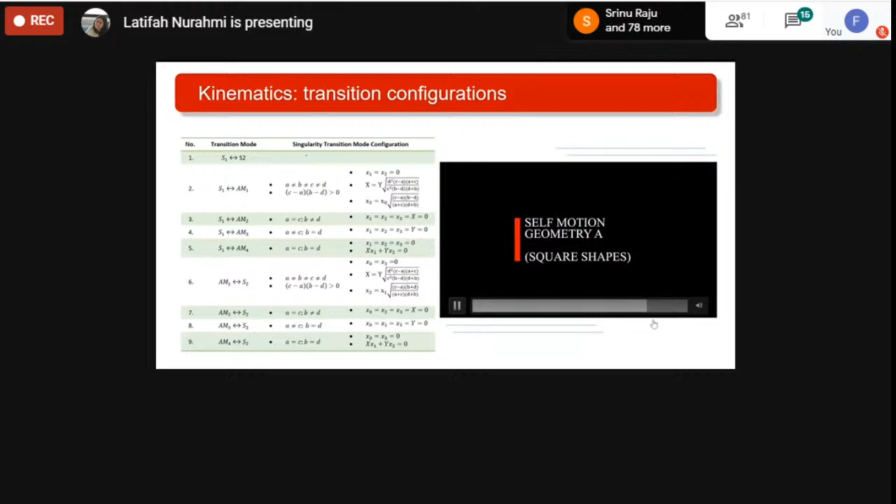And here we have another theory - this belongs to singularity, but it's actually quite different. So imagine if you have a mechanism, and you actuate all the actuators, 4 actuators here for the red color. When you are actuating it, it means the platform should not be moving, but in self-motion, the platform can have a full motion. So it's different from singularity. In singularity, you have a shaky motion, but in self-motion, your platform will have a full cycle, meaning it has a completely new degree of freedom.

And in our prototype, we can also show the self motion.

Now I will continue with the dynamics. We have shown that this mechanism has several operation modes, and to change from one mode to another, it has to cross constraint singularity. Now we are going to deal with that, but at the dynamics level. We are still working on it, so we don't show the full results in this presentation, but I will show results that we just presented last month: crossing actuation singularity at the dynamics level, and this is possible. Here is the red curve, a singularity loci.

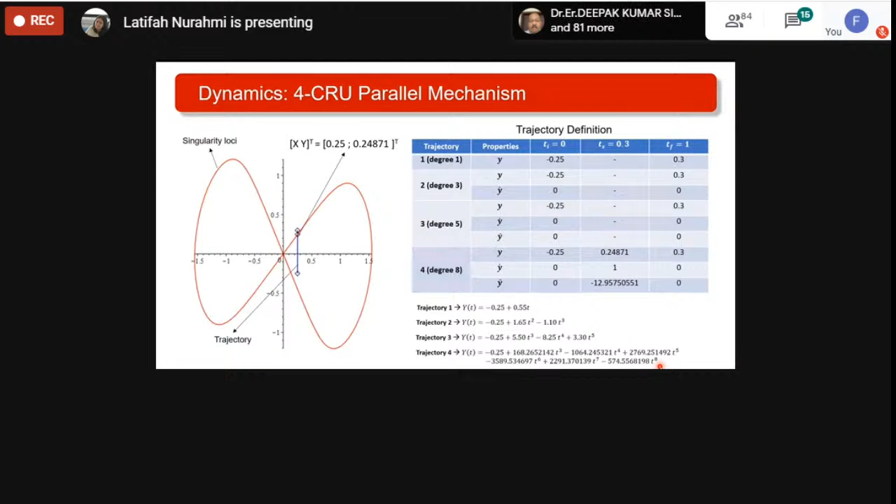Let's see if we plot this. So this is not the results yet, this is the displacement in terms of function of time, I'm sorry.

So here degree one is a simple straight line, which means in 0.2 seconds I will be here, in 0.4 seconds I will be in this position, and so on. This is a simple straight line. And then degree 3...

To reach this point, I will go slower than this displacement, if you see this curve. And also here with degree 5, I will go slower first, then a bit faster, then finally go slower.

And here is my new trajectory of degree 8. I will go quite fast first until I reach singularity, then I will go slower to compensate the previous velocity and accelerations. Then I will go to 0.6 and come back close to the singularity. This is actually a compensation.

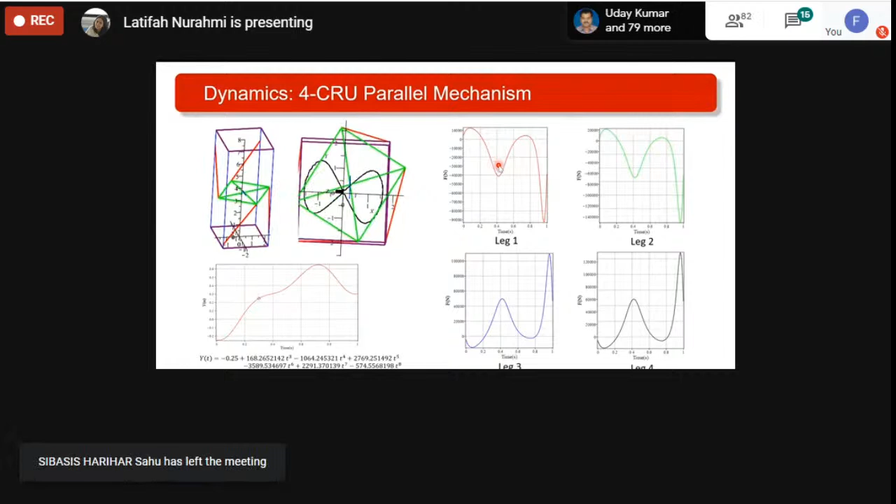Now let's compare all four trajectories. So trajectories 1, 2, and 3 all have shaky and uncontrollable motions. But trajectory 4, degree 8, at singularity 0.3 seconds, is controllable, which means this algorithm can be applied to my mechanism.

Okay, so that was all about reconfigurable mechanisms. I want to share a little bit about type synthesis of a hybrid 2-DOF gantry mechanism.

If we take a look at the left video, this is the industrial application for cutting.

Usually in industrial applications, we use a simple gantry frame. The gantry frame is a planar mechanism, and it will be subjected to bending. So now we want to reduce this bending effect by using a hybrid mechanism, the hybrid architecture. This mechanism will still have a planar motion, but the architecture is spatial. Can you imagine it? So you have a spatial architecture. We can see it here in the right video.

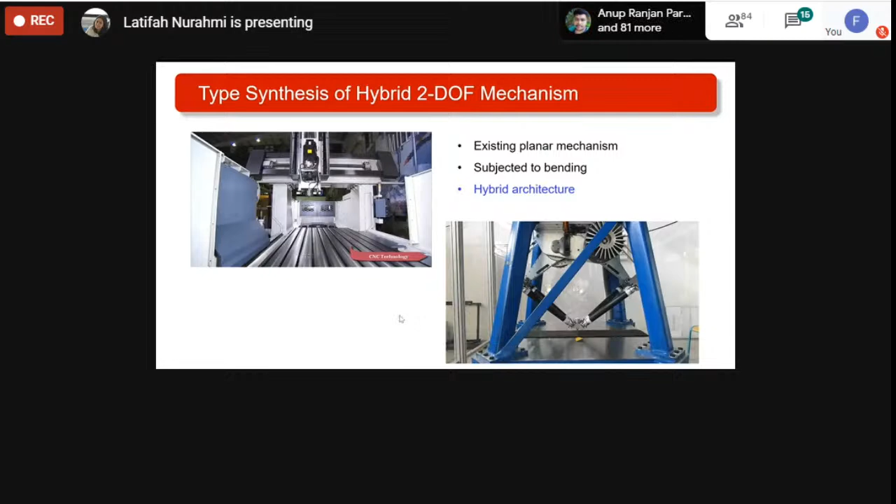The motion is still planar, but the architecture is spatial in space. Then we want to design another mechanism which exhibits the same hybrid architecture behavior, but with 2-degree of freedom motions. We are using screw theory, and you can see this theory in the book of Gosselin and Xianwen Kong about type synthesis. There is a very systematic approach for designing a mechanism using screw theory. We derive first, we have a platform, we have a base, and we want to connect them together using a leg kinematic chain, which should have a spatial architecture.

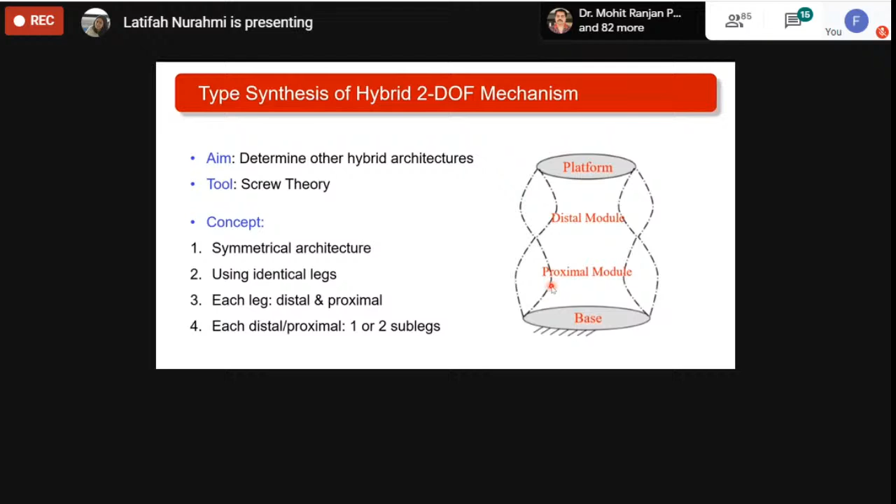We call it distal module, distal leg, and proximal module. Here is the process of type synthesis of my mechanisms. First we define the platform, we define the base, we define the simplest kinematic chain that connects both of them, because it has 2-degree of freedom translation, it can be depicted by PP, prismatic virtual chain. From here we came up with many designs. Actually I put it in the wrong slide, so I will jump directly here.

Okay, so here is our design. Let's take a look here. The shape is just like a spider probably, but the platform—if I fix the top as a base and move the below part as a platform, this platform will have only 2-degree of freedom motions.

I have an animation here. Yeah, this is an animation. This was published in 2014. So the platform will have only 2 translational motions, to the left, right, and up and down. But you see the legs, they are completely spatial. So if you put a cutting tool in the platform here, you will be free of a bending effect.

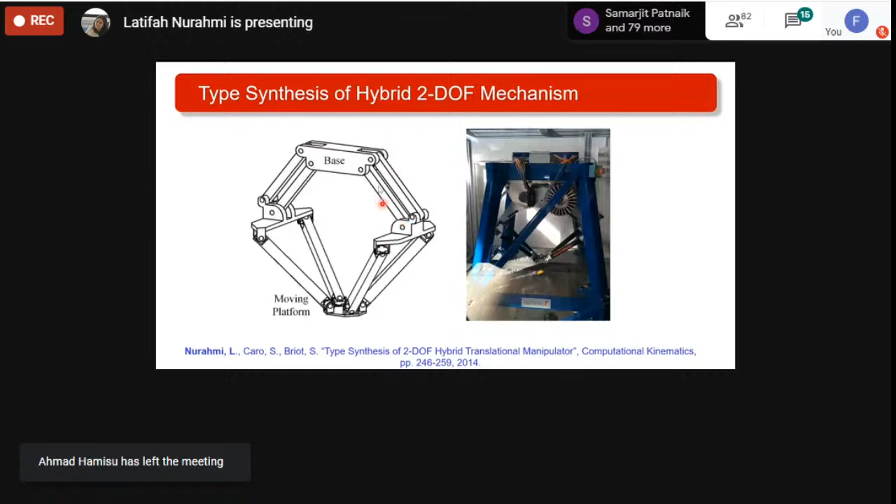And then with the same systematic approach, we came up with the robots that I have shown you previously. This is actually the architecture of the robot. So the proximal module is composed of a parallelogram, and the distal module is composed of a completely spatial kinematic loop. This is UU. And this was patented in 2012.

And I will go back a little bit. The last part of my talk will be about cable robots. I will show you this—it's taken from the internet, and I didn't have quite time to give the reference, so I hope there is no issue about that. So this robot was

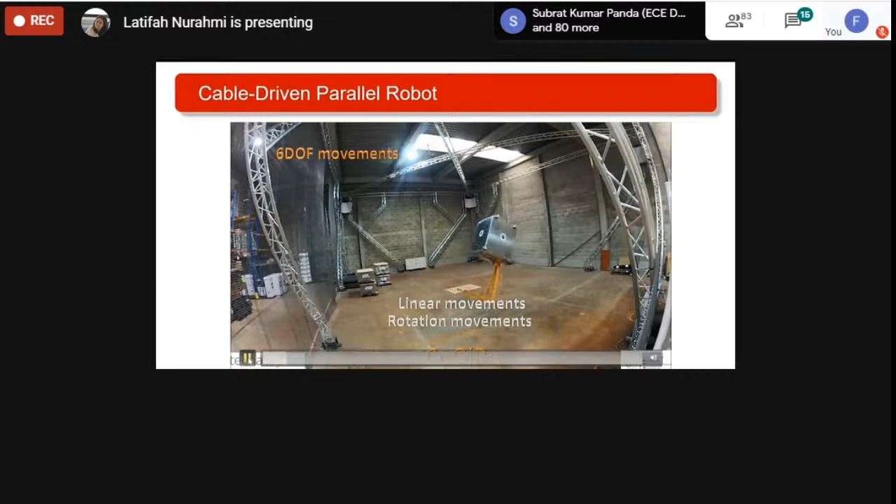designed in France by Tecnalia. So if you see, it's like floating. There are no rigid links at all, but actually there are cables—so many cables—and we call these cable robots. The advantage, you see, this is the cable. The advantage of cable robots is that they are light, but can lift very heavy parts.

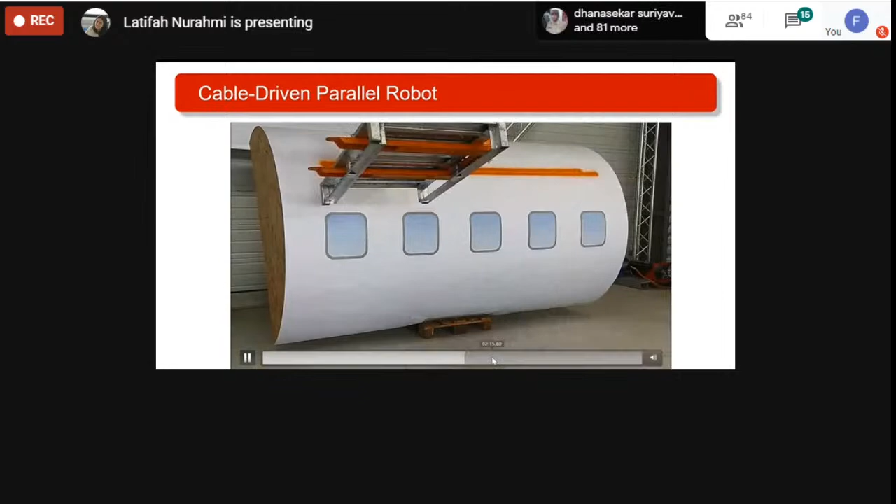I will go quite fast. This is for material handling in the aerospace industry, and this is for painting and brushing large structures using a cable robot. This is for material handling using a cable robot. And this robot is named CoGiRo—I think it's the name of their project, so they named this robot CoGiRo.

So I'm not doing anything—I don't have anything to do with this robot. That robot was just to show you the idea of cable robots.

So what I'm doing here, back with my colleagues, is building our own cable robot. This will also be used for manufacturing and small material handling, pick and place. So we are using 4 cables. What we are analyzing is the reconfigurability of the pulley—if we change the direction of the pulley, how does this robot behave.

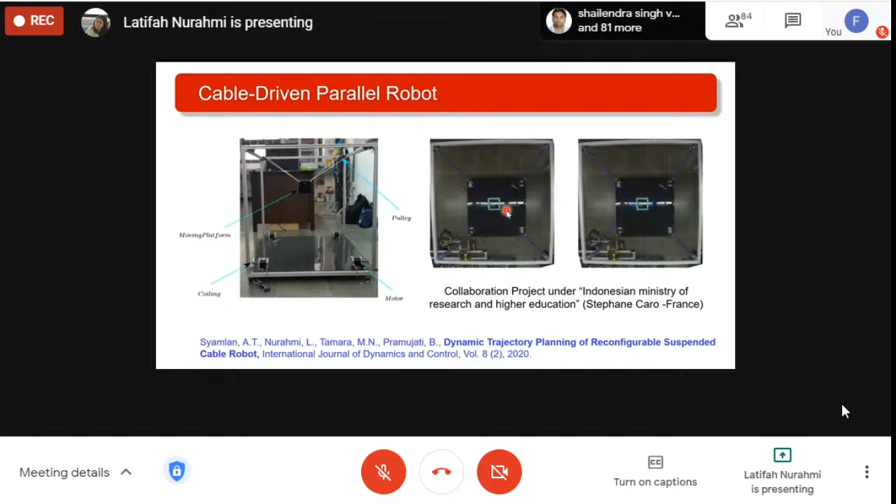And not only that, we also change the configuration of the cables. You see in the right picture here, there are blue lines—these are cables. So we analyzed: if I don't know anything about cables, I will just assemble my cable robot like this. But actually it has drawbacks, because exactly at this point, moving up to the top vertically, it is always in a singular configuration. So your robot will always be shaky.

And now I have to change the configurations. I have to change the cable arrangements to be like this, so the cables cross each other like this. You see, now in this cable arrangement, my platform, when it is in this position up to the top vertically, is no longer in singularity.

So this project is a collaboration with my partner from France, and it has been published this year, 2020. If you want to look at it in more detail, we are working on its dynamics and control, more about trajectory planning. You can take a look at the journal if you want to see more detail. And then we are moving on from that.

We have a new concept here in my country, Indonesia. We are sitting exactly at the Pacific Ring of Fire. There are many earthquakes, natural disasters, landslides, and so on. So usually up to now, we are dealing with it using manual work. It takes quite some time to recover, even using a simple bulldozer or crane.

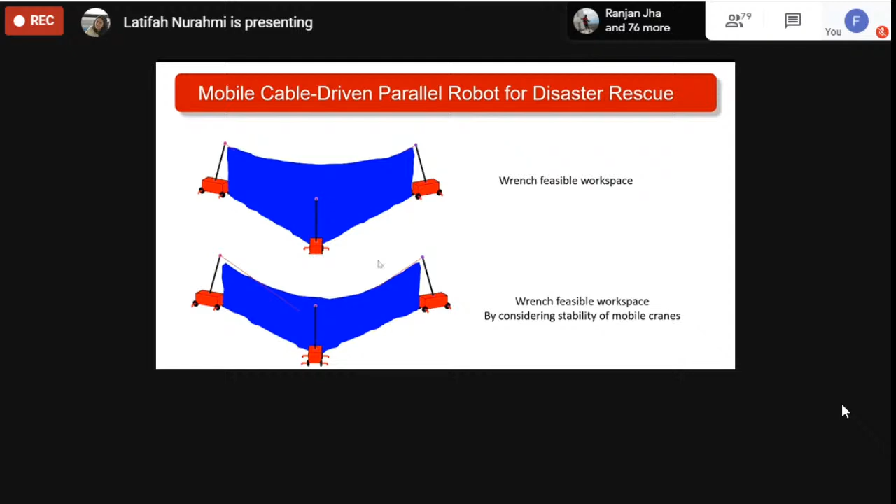Do I still have time? So I will show you the last video. This is to show you.

Right, that's the end of my talk. I took a quote from Marie Curie. I believe you all know she was a Nobel Prize winner in physics, both in physics and chemistry - she's the only one. Nothing in life is to be feared, it is only to be understood. Now is the time to understand more so that we may fear less.